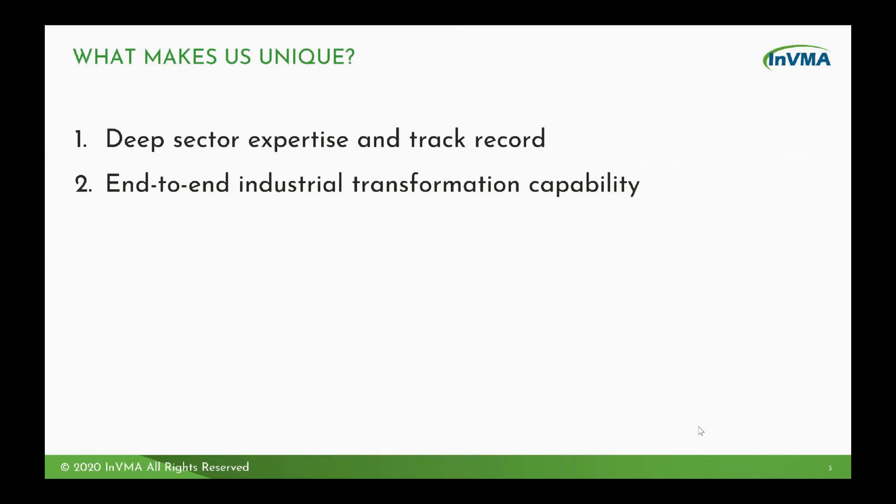We have an extensive ecosystem of partners. They include PTC with their ThingWorx and Vuforia Studio, Microsoft Azure, ARM for connectivity, Dell for gateways and hardware. The other thing that makes us unique is our flexible products and services.

We have our AssetMinder product, which enables you to rapidly get to value in your digital transformation or smart factory implementation. Our services range from a simple discovery workshop to expose you to new technologies that may impact your business, through to a strategy workshop with your senior leadership team to identify where the best bets are to place with new digital technologies.

A design and implementation workshop, which looks at how and what's the best ways of implementing in your specific situation, followed by our more traditional application development and system integration services. And of course, once you have done the implementation, our support package and service level agreements help maintain the savings and investments that you've made.

Why did we decide on starting this webinar series? Well, bluntly, it's because digital transformation is happening now. A recent study by PwC showed that 90% of industrial companies are investing in digital factories. 70% of companies consider digital manufacturing at the top of their operation strategy agenda, according to McKinsey.

And indeed, in the United States, the National Association of Manufacturers have made the statement that industrial companies need to capitalize on digital technologies to defend and advance their competitive advantage.

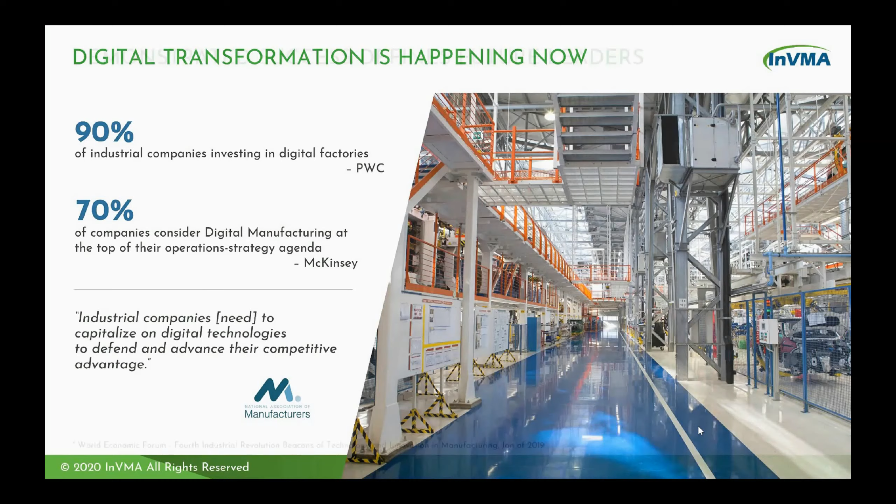Indeed, the World Economic Forum have found that those companies, the lighthouse implementations as they call them, yield a huge impact. They've reported double-digit KPI improvement in areas from factory output increase to productivity, to OEE, to product cost, to time to market reduction.

And indeed, Standard & Poor's have noted that failure to act and make digital implementations over the next 10 years will mean half of the Standard & Poor's 500 firms will be displaced.

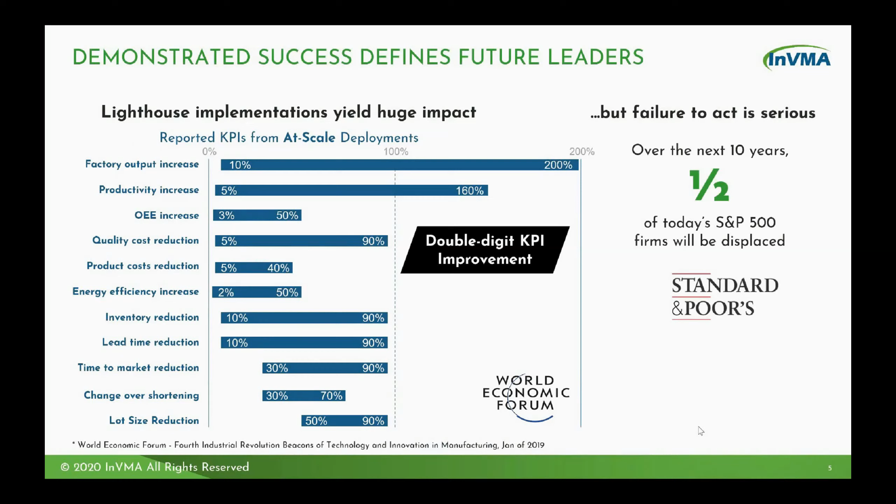Most companies fail to move to this stage of scale and capture value at scale. McKinsey in 2018 identified that in large factories, there are up to 8 digital transformation related pilots running in each factory, but only 25% of those succeeded. 75% of those failed to go on to deliver any continuing value.

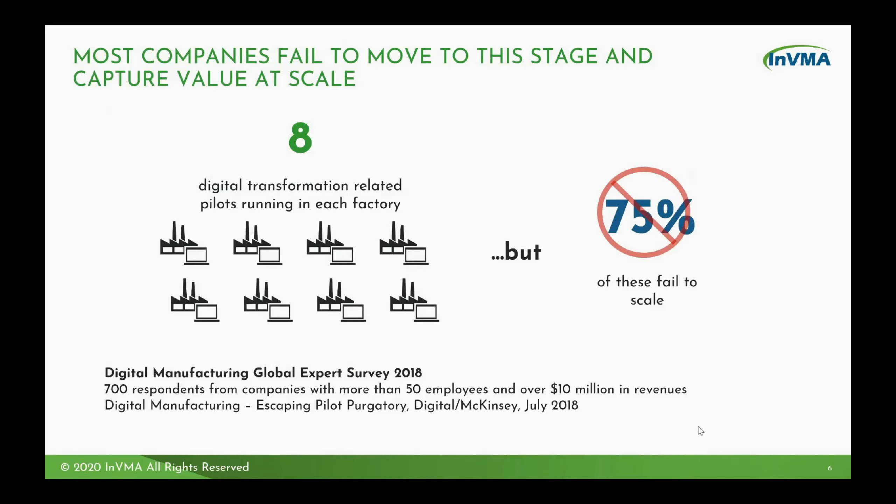And that's why we set up the webinar series. What we're trying to do is, through demonstrations of the technology and our approaches, but more importantly, presentations from our partners and our customers who are going through this process or have delivered on these processes right now, will prove valuable to our other potential customers and current customers.

In the next 25 minutes or so, we're going to discuss the advantages of predictive remote monitoring, and then bring it alive with some use cases from one of our customers and good friend, Alan Findlay from Drive Management Services.

Before we start, we wanted to give some view of the agenda. Really what we're trying to do is show the value of using data to prevent failure and the consequential damage and costs that causes.

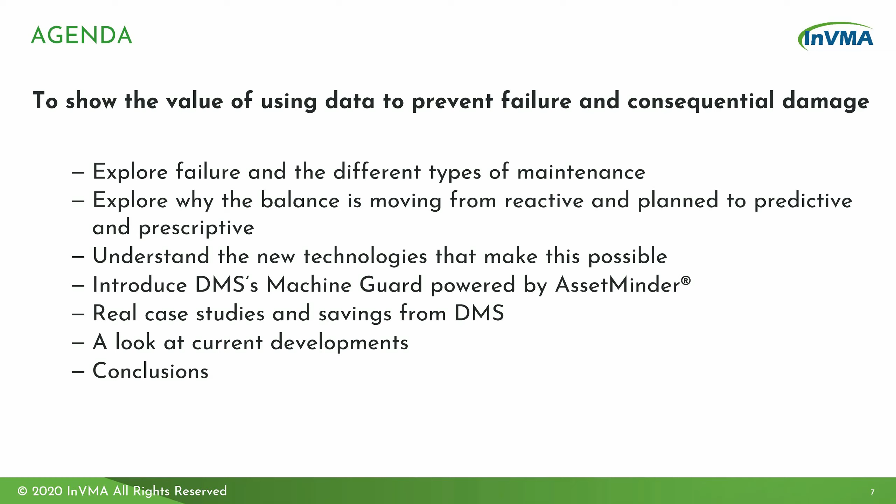We're going to start off exploring failure and the different types of maintenance, and why the balance is moving from reactive and planned to predictive and prescriptive maintenance. We'll understand the new technologies that make this possible, introduce you to Drive Management Services' Machine Guard powered by AssetMinder product, use some real case studies and savings from DMS with their customers, look at current and future developments, then conclude and open up to questions.

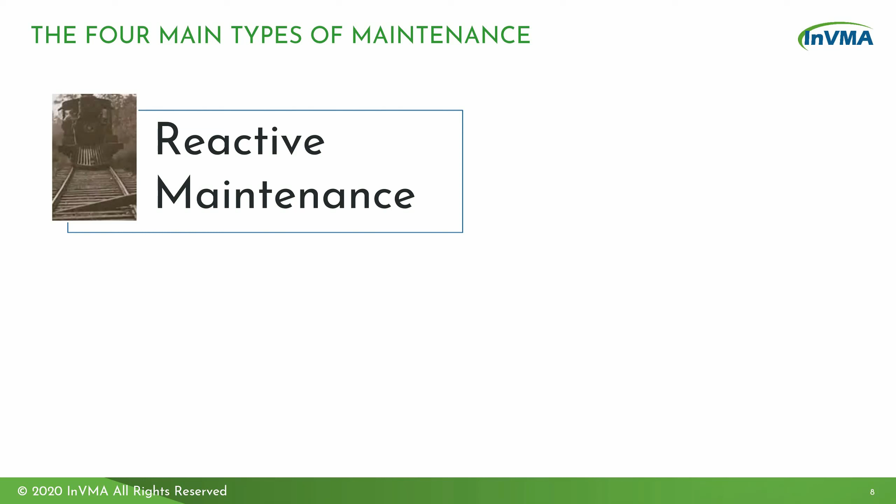Most of you will know this already, but just to recap, there are four main types of maintenance. Reactive maintenance: you wait till it breaks and then fix it. Preventative maintenance, a bit like a car service, where based on hours of usage or time, you go through a checklist and do a set of tasks to extend the life of the product and the asset and stop it breaking down.

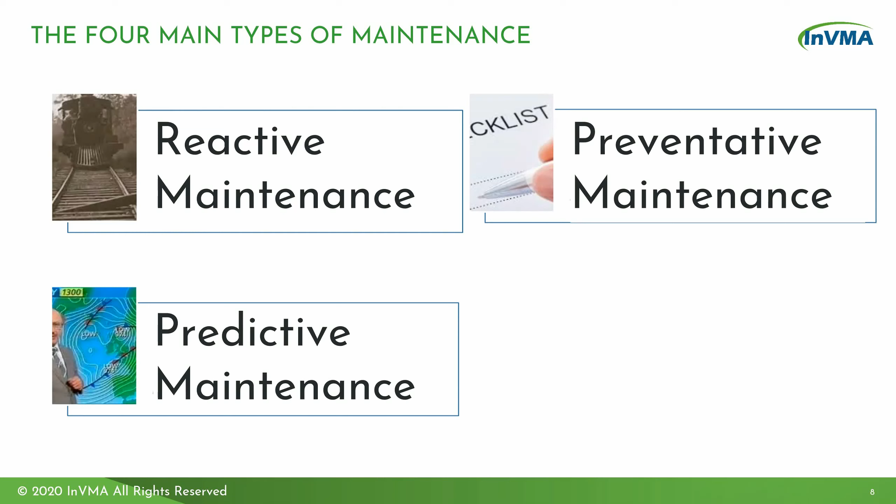Predictive maintenance is what we're going to use today, where you use sensors and measurement to understand the likelihood of a failure occurring and then take action to address that. Prescriptive maintenance is much like predictive, but uses the data to tell you not only when something's going to go wrong, but what is going to go wrong and how you're going to fix it.

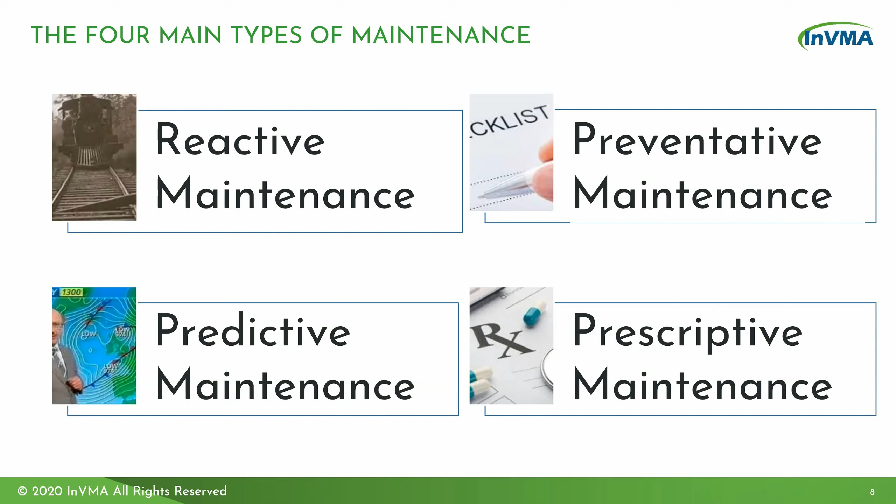The case for condition-based monitoring or predictive maintenance is that for some manufacturers, a 10% reduction in maintenance costs is equivalent to about a 40% increase in sales on the factory P&L. Think about that for a minute. Every pound you save on maintenance, every pound you save on downtime goes straight to your bottom line, and the extra revenue you'd have to get hold of otherwise is significant.

Throughout the world, the best overall equipment effectiveness, which includes availability, is 97%. World class is 83%, the average is 66%, and in some countries, particularly the UK, it's down at 50%. Another way of looking at it, this means nearly a third of investment in assets is wasted - all that kit lying there unproductive. A lot of this waste is driven by poor quality or unplanned downtime.

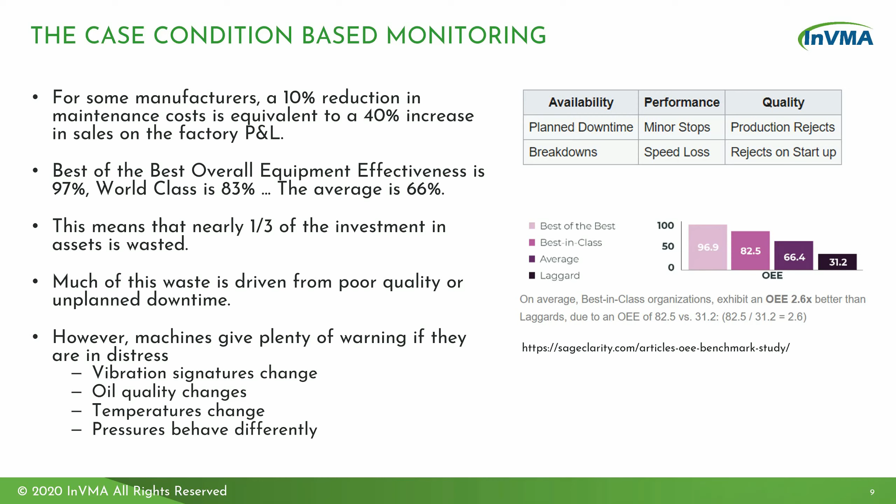However, machines give you plenty of warning if they're in distress. Their vibration signatures can change, their oil quality can change, their temperatures can change, pressures behave differently, and indeed the current they draw will change.

So if we compare two cycles, a normal reactive cycle and a predictive cycle - if we look at a reactive cycle, the asset develops some abnormal health condition, and generally an andon light comes on or there's some indication on the HMI. Then an operator notifies maintenance through a message, for example, or a works order. They open the work order and the maintenance person gets dispatched to the asset.

They look at the sensors, the signatures, the history. They look at the machine overall. They review the asset and then make some remediation based on that and verify it. In that time, you've had the downtime.

Now with predictive, what happens is we get upfront some sort of automated anomaly detection with alert and notification. So the maintenance teams have already assessed that, even before it starts getting into true distress, that there's something to consider. You can have a look online, review the sensors, signature and history, and that leads to shorter debugging and troubleshooting time, and shorter remediation time. You literally go out to the machine with some sense of what you need to address before you get there, and that significantly reduces the amount of unplanned downtime through the use of predictive.

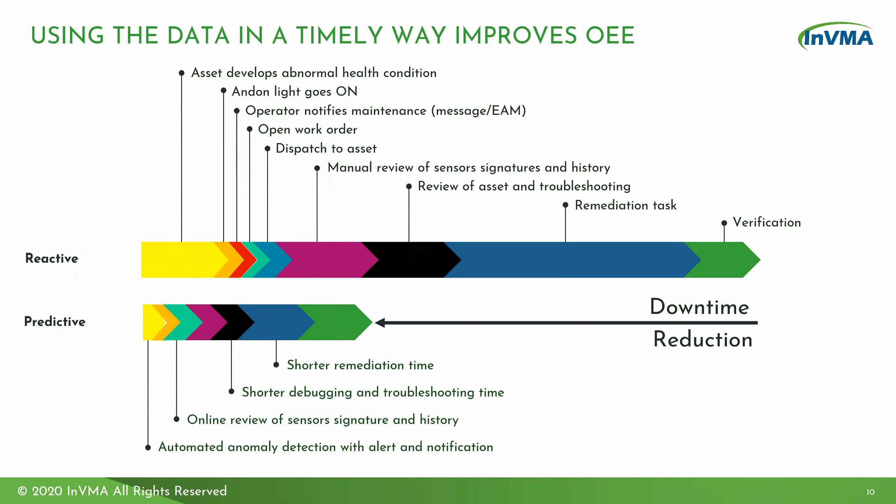But if the case is so obvious, and we believe it really is obvious, what's been stopping us? Well, it's really split into four categories as we see it. The first one is cost.

To put a fixed condition-based monitoring system in puts a lot of hardware and installation cost. Also, when you're specifying machines in the early days, the project engineer will be looking at the CapEx project and what they're trying to do to get inside budget, potentially at the detriment of the overall lifetime operating costs.

Condition monitoring traditionally has involved an engineer or specialist coming to site to attach temporary and handheld equipment against the asset, giving advice on estimated time to failure and the maintenance regime required. That involves a highly qualified person travelling in a van to see you, so it's costly.

The other barrier is access - just getting physical access to the systems and machines, even with handheld items, is difficult in some cases. Wiring in fixed condition systems is in itself disruptive. There's a barrier as well in terms of skills.

A lot of the systems that have been put in are highly complex, relying on significant interpretation of data, requiring individuals in the factory to look at that compared to other issues they may be dealing with around reactive maintenance. So it's not their focus.

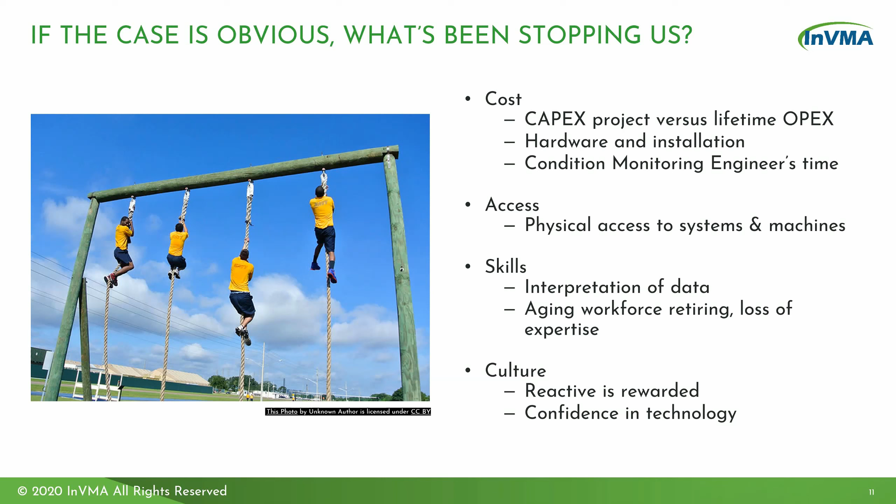Now, to address those barriers, there's a few changes that have been happening. I'm going to go through the technology, and then Alan is going to show a practical implementation of it, so bear with us. The key main thing we have is this convergence, this thing called the Industrial Internet of Things.

We're getting convergence of technology between what is ubiquitous in the IT world and what is happening in the operations technology world - the information technology and operations technology world are converging. The consequence is the cost of technology into the industrial environment is reducing significantly, including the cost of sensors.

I want to go through a few of the main technologies that are really reducing the barriers and explain how. The first thing is the connected assets themselves. One of the key points we had was the CapEx cost of the assets. Well, with the number of assets now where machine connectivity and communication is being built into the core asset - because OEM providers see it as a way of providing additional services to customers - is astounding.

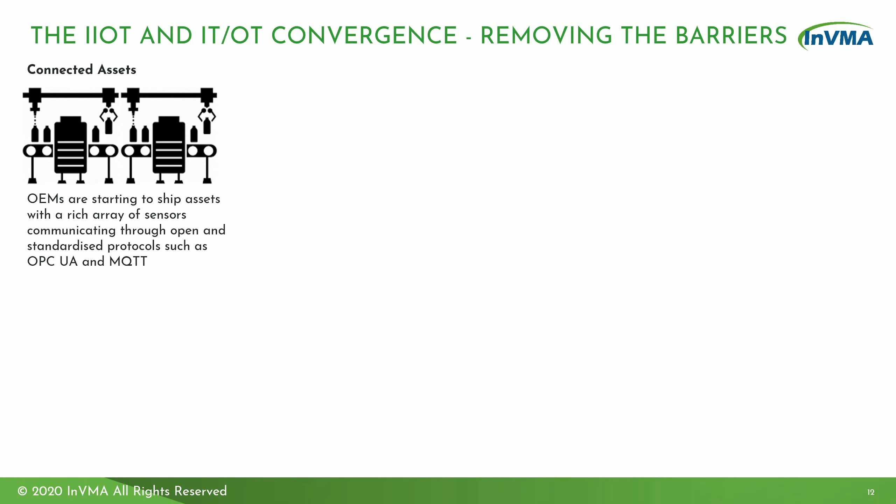So basically OEMs are starting to ship assets with a rich array of sensors now, communicating through open and standardized protocols such as OPC UA and MQTT. So the people putting in new machines are getting in on the act.

The second thing is, if you haven't got new machines and you're looking at doing this on a retrofit basis, there are plenty of wireless sensors and protocols around. Wireless sensors with long battery life are available for cost-effective retrofit - things such as vibration, temperature, pressure, humidity, even health and safety ones around air quality, and certain gases now in terms of wireless sensors.

And what this does is significantly reduce the cost of installation, the downtime, and really changes the swings of where the business case is.

The next thing is compute, the edge gateways - these are industrial small mini computers that sit next to sensors and machines, with some compute locally that can run algorithms to identify if a machine is in trouble. They're becoming more ubiquitous and available; there's a plethora of them on the market, and they have the connection and software onboard to connect to any asset protocol and also these wireless sensors.

Now that gives you the connection. The other thing that's changing is secure fast communication. We've got new 4G, 5G networks with secure private access point names, private APNs, providing access to cloud computing. We've got new industrial standards about machine connectivity and security, which are ensuring that the data coming from a machine and going to analysis elsewhere is very well supported.

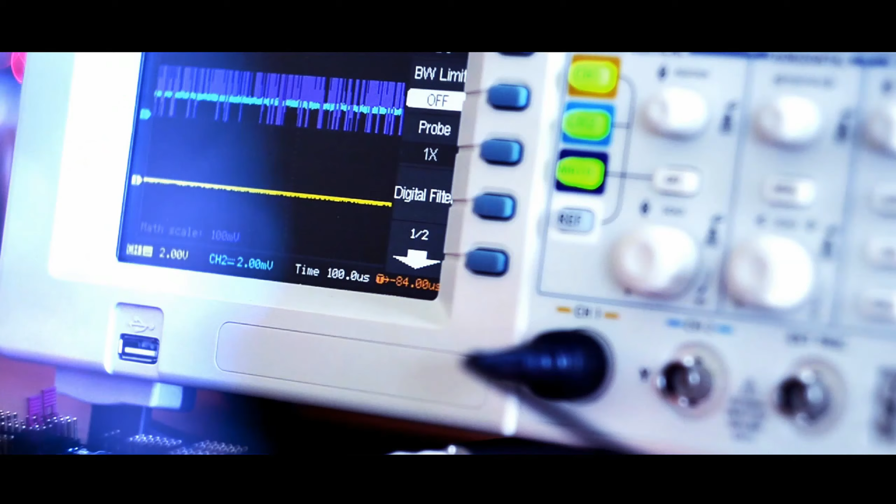Introducing a revolutionary approach to condition-based monitoring. A system that has been designed, tested and refined over the past 20 years to offer a truly remarkable, cost-effective solution to virtually every industry sector.

The Machine Guard solution has been developed to identify potential mechanical failure within critical assets, enabling you to take necessary action before any costly problems occur.

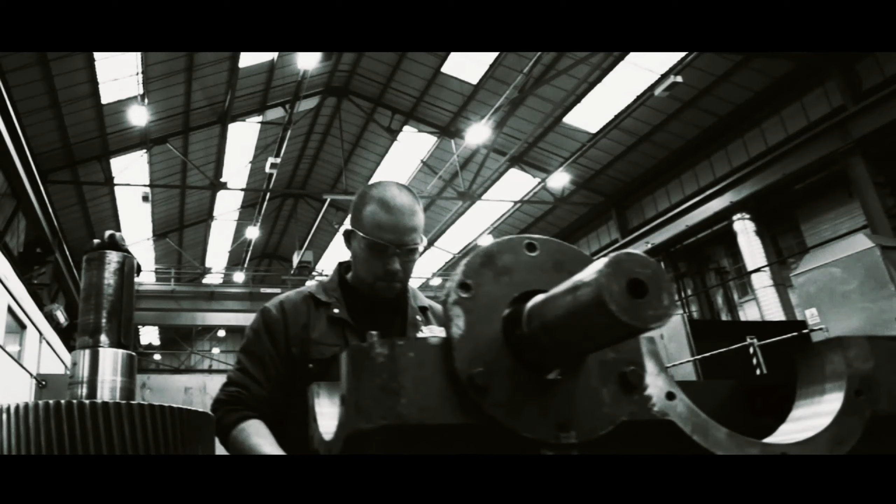Machine Guard's core technology, which originated in the highly specialized aerospace and Formula One motorsport environments, has helped save our clients literally millions of pounds in lost revenue due to unnecessary downtime.

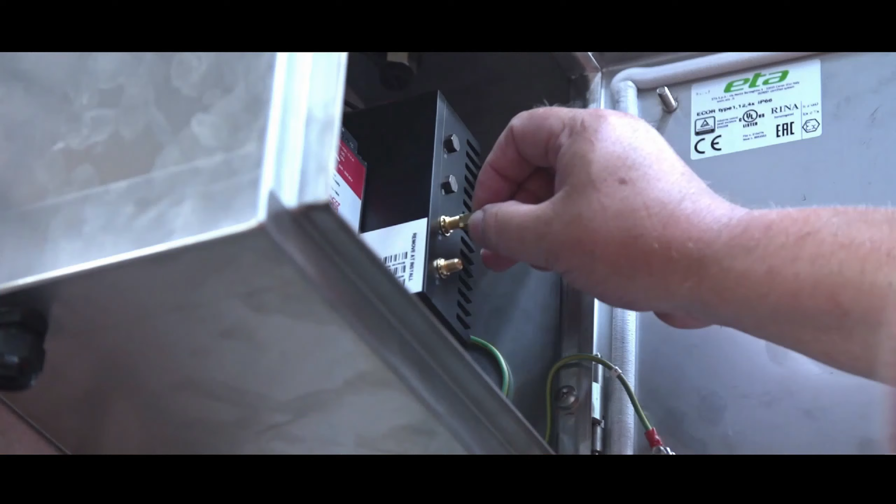We work closely with every client to identify their critical assets and outline the best way to apply the Machine Guard solution. The easily installed gateway can accept data from a wide variety of sensor types, including our cutting-edge Bluetooth vibration and temperature sensors, suitable for use on any critical rotating or reciprocating equipment, including gearboxes, electric motors, fans, pumps, and much more. And because it's a wireless solution, installation is quick and efficient.

Streamlined access means any internet-connected device can be used to monitor critical assets via the AssetMinder cloud-based platform, a powerful 24/7 managed monitoring system providing alerts that can be triggered using the format best suited to your business.

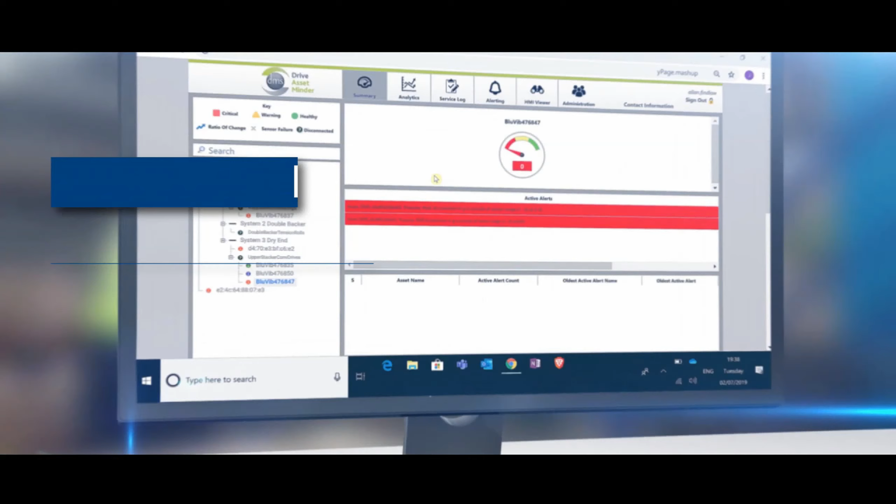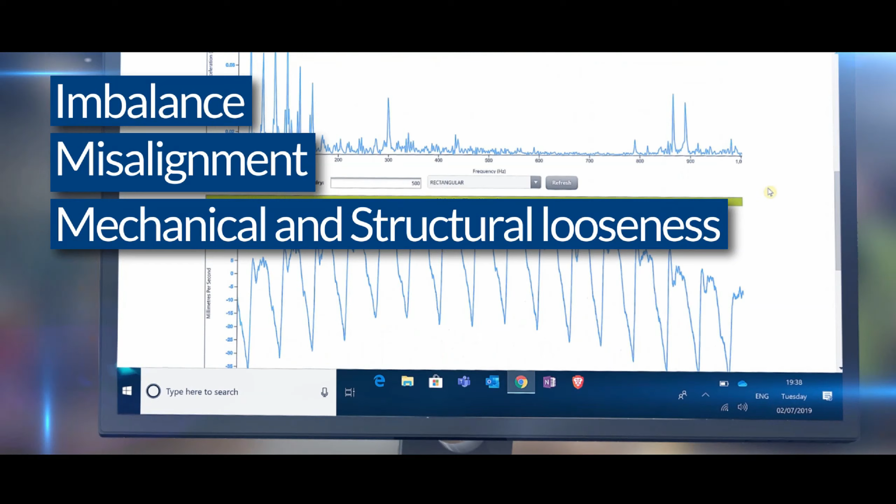From a single site to a global operation, Machine Guard, powered by AssetMinder, can provide the kind of all-encompassing protection your organization needs. Remotely identifying imbalance, misalignment, mechanical and structural looseness, bearing and gear damage, lubrication starvation, cavitation, and other potential issues. Welcome to the power of predictive maintenance.

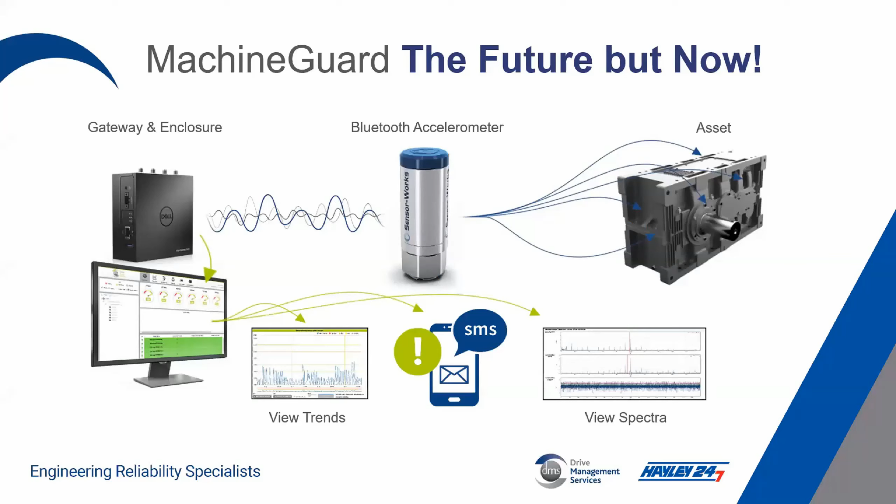As you've seen on this video, this is the future, but it's also here now. As an engineer of 40 years experience, I can't begin to tell you how delighted our site installation engineers are now that we have these Bluetooth accelerometers.

It reduces our installation time by approximately 75%. No running cables in along existing cable runs, trying to identify tray width that is suitable, and finally, trying to install cables in locations that are difficult to access.

1, continuous monitoring to a predetermined scheduled time. 2, wake up. It wakes up every so many seconds, assesses the vibration level, and if an alarm level hasn't been exceeded, switches itself back off, only alerting on exception. And 3, triggered manual wake up via a magnetic switch.

They use ultra-low power and use replaceable batteries, utilizing Bluetooth version 5 for increased battery life. In your traditional industrial facilities, you can expect to collect data from 50 meters away. There are also 2 versions available, a non-hazardous and an ATEX hazardous.

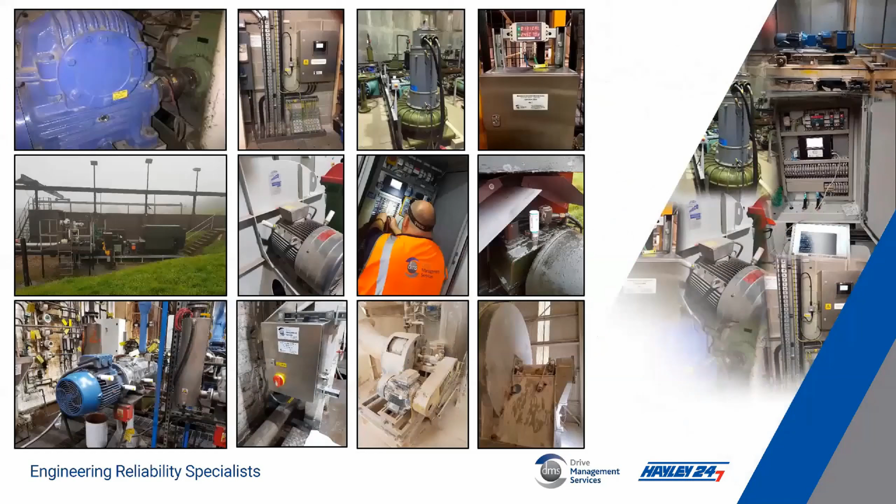The next section is based on 3 case studies that all display the capabilities of the hardware, system, and more importantly, the diagnostic service we provide.

Case study number 1 is a critical stack fan located in the main process plant of one of our clients. The system was installed with us taking readings from both motor bearings in the radial plane, both fan bearings in the radial plane also, and an axial reading from these fan bearings.

DMS receives alerts regularly from the motor, so the DMS diagnostic engineer quickly identified by the velocity FFT that you can see on the screen that the motor was loose.

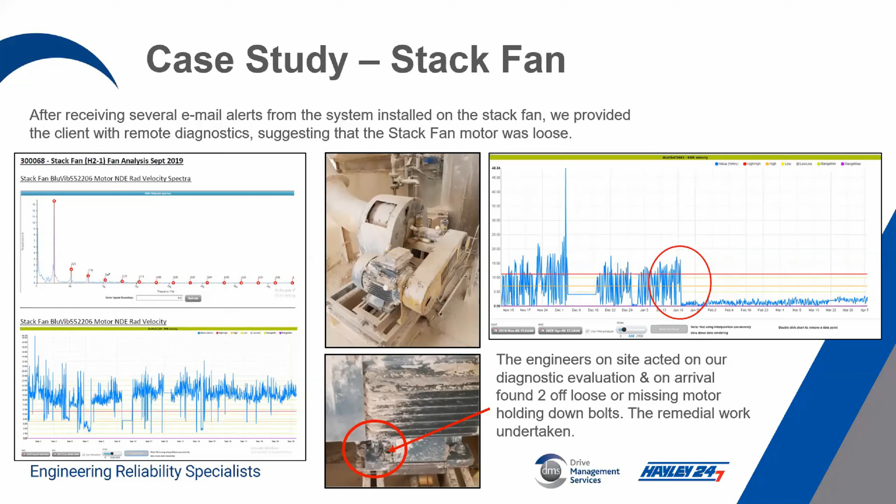The site engineers acted on our evaluation and found the 2 holding down bolts at the non-drive end of the motor were loose, and actually one had the nut missing. You can see the trend readings after the remedial work was completed on the right hand side.

The second case study: within the first month of our system being installed on this major critical process fan, we received a number of email alerts in acceleration on both the fan bearings.

On completion of our analysis, we were able to advise the client that both fan bearings had significant wear and damage, which had been identified by the defect frequency for both the rolling elements and the cage.

Unfortunately, because this is a 24-hour process plant, the next planned window for maintenance wasn't due to take place until the 2nd week in October 2019. As part of our service, we were asked to monitor on a daily basis and report to the client if these bearings deteriorated faster and quicker than anticipated.

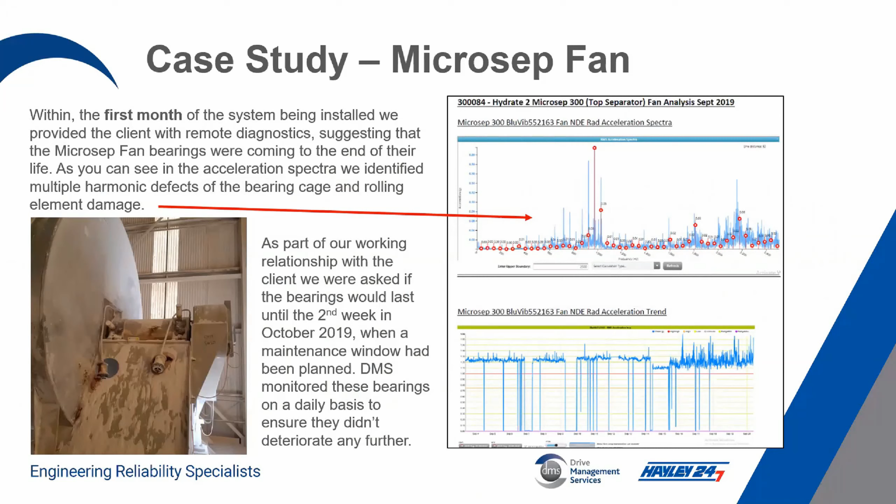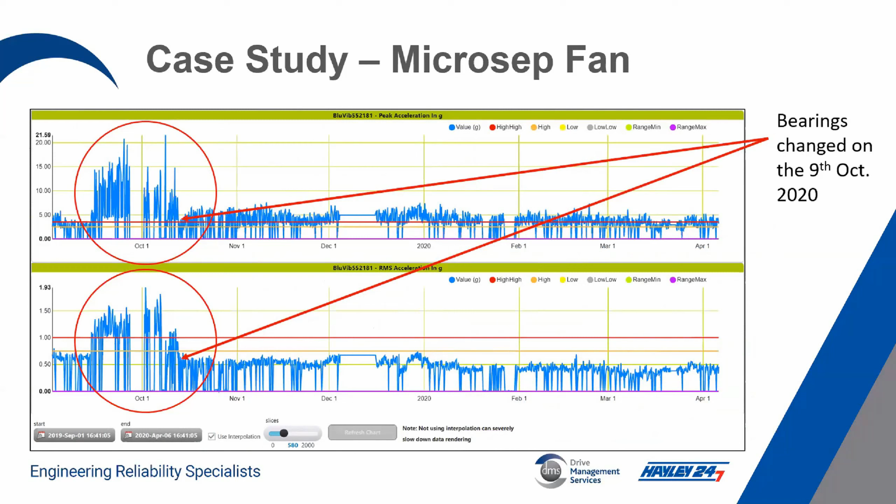You can see from this slide how, together with the client, we managed to nurse these bearings until the planned change on the 9th of October 2019. Since this bearing change has taken place, the levels have stayed consistently lower and within agreed levels.

Case study number 3: we were invited to work with a UK specialist fuel pumping station to help them monitor their critical multi-stage pumps. These pumps are unmanned and in a remote location.

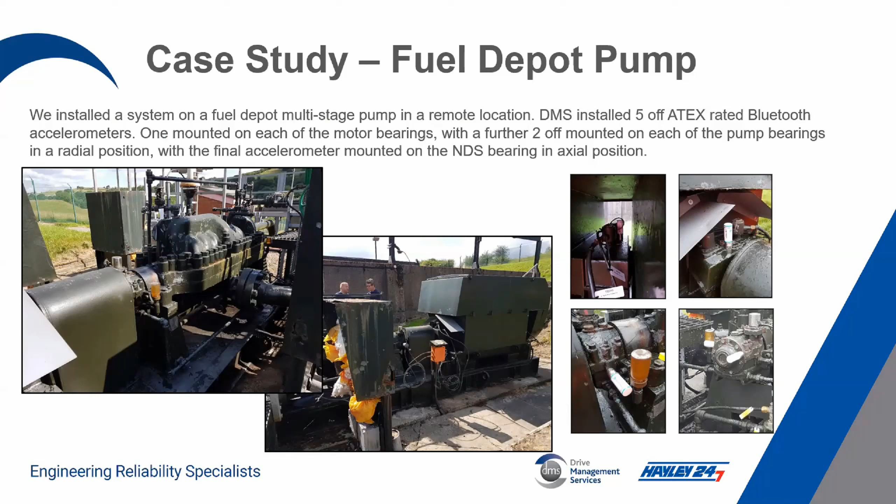We installed 5 off ATEX Bluetooth accelerometers due to them pumping fuel and monitored them in the following positions: both motor bearings in the radial plane, non-drive end and drive end, and both pump bearings in the radial plane, drive side and non-drive side, and one final accelerometer on the axial position on the non-drive side. These can all be seen in the photographs on the right-hand side.

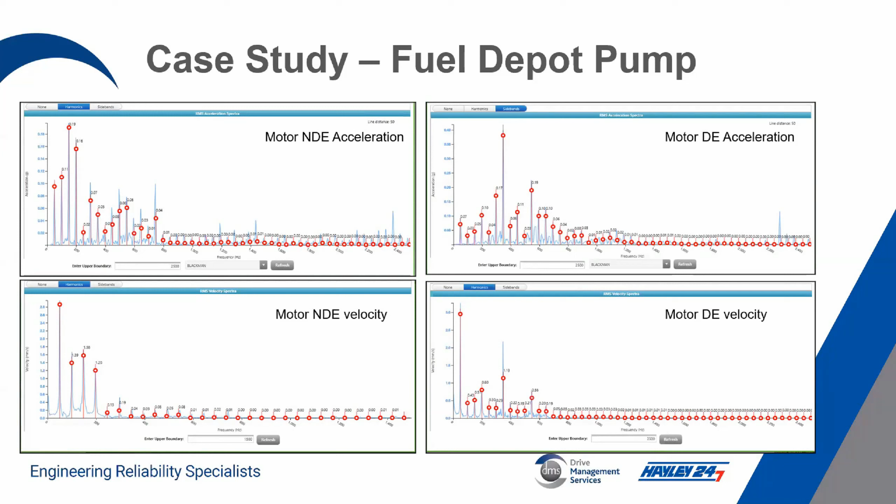Within 6 weeks of the original installation, we were receiving alerts on both RMS acceleration and peak-to-peak acceleration from both motor bearings. On analysing the FFT information from the Bluetooth accelerometers, we suggested to the client that we thought there was mechanical looseness, probably associated with significant wear on the white metal bearings, and as a consequence should be investigated on an urgent basis.

Prior to the client removing this critical asset from service, they requested further confirmation of this suggested condition. We at DMS arranged for one of our CBM engineers to visit site and take a full set of readings using our machine-centric handheld vibration analyzer.

On receipt of this separate report, the asset was removed from service and delivered to a local independent engineering repair centre who specialise in motor and pump overhauls.

On completion of their investigation, they generated a report which confirmed that all the white metal bearings in both the motor and the pump were significantly worn and had progressive loss of white metal in the loaded zone.

This damage had also created secondary damage on the impeller hub locations, which were worn and scored, suggesting that the hub had been rubbing against the bush. This was a fantastic result for both DMS and the client.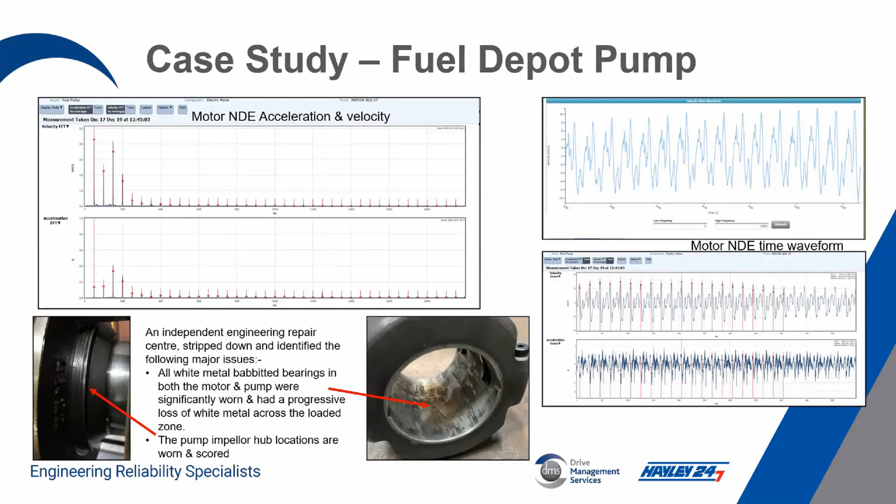So what are the benefits of using the DMS Asset Minder platform? We have remote system adjustment once installed, using inbuilt Kepware and Ubuntu on the gateways, enabling additional sensors to be added easily and amendments to be made quickly. All types of sensors can be monitored: oil condition, oil temperature using TAN Delta oil quality sensors, flow, pressure, running speed, ultrasound, fuel density. This enables us to monitor the all-round condition and health of the machine, not restricted by traditional condition monitoring sensors.

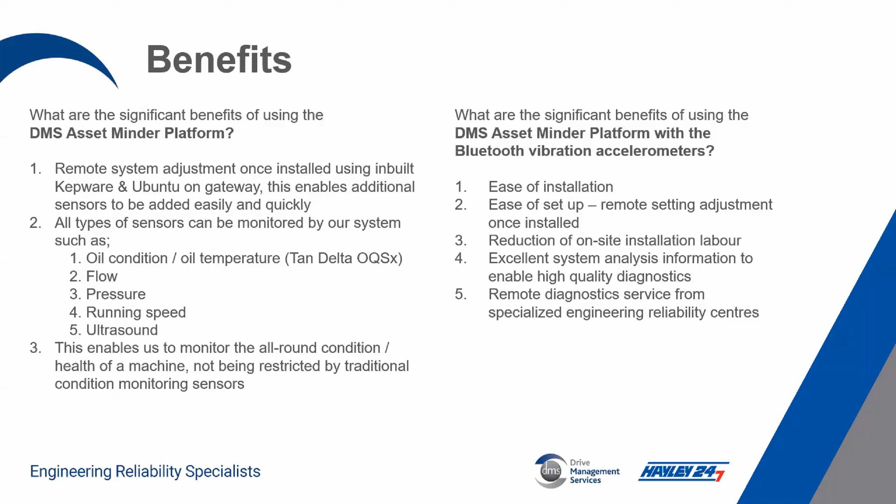So there are significant benefits of using the DMS Asset Minder platform with Bluetooth vibration accelerometers: it's easy to install, there's ease of setup with remote setting adjustment once originally installed, a reduction of on-site installation labour, excellent system analysis information enabling high-quality diagnostics, and remote diagnostic service from our specialised engineering reliability centres.

If we look at developments going forward that are here now, we have technology available where we're looking to integrate into the machine guard system. This is the starting process for machine learning, taking data from various parameters, as you can see on screen, and understanding what certain operating conditions are considered normal.

However, when a system starts to see a change or an anomaly, in near real time, we can use that information to determine what the alarm rules and settings are.

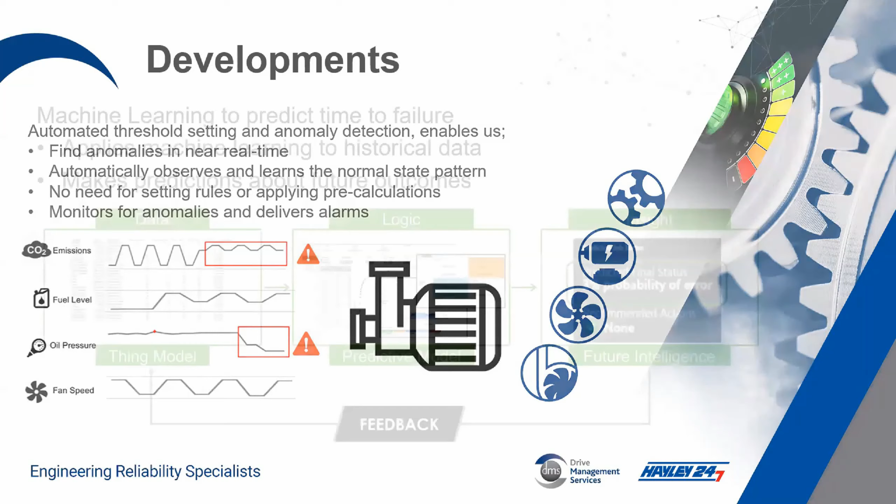Machine learning enables us to build a predictive model based on historical data and compare it to near-live data. This predictive model enables us and our clients to make insightful decisions. This is known as a digital twin, as it compares real live data from a machine to a model of a similar or identical machine in certain operating conditions. This makes our decision-making process smarter.

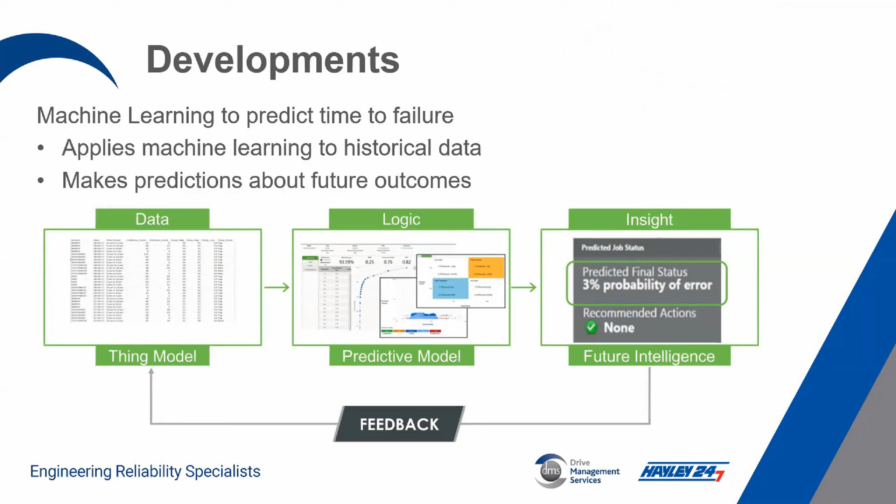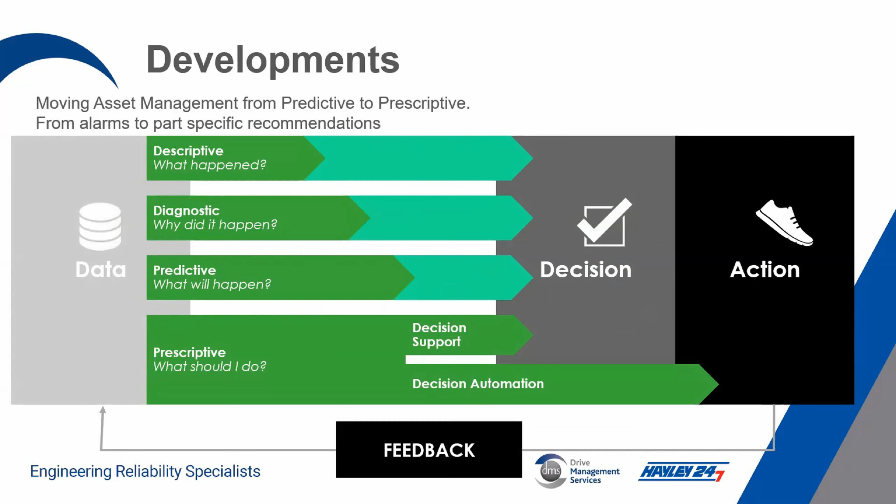This final slide displays how we see the maintenance engineering journey becoming more apparent in the forthcoming months and years. This is the stage that will enable us to automate some of the work of the condition-based monitoring engineer on an expert-type monitoring system, leading to the next step in achieving world-class performance. We take the data, we make a decision, and we have an action.

To summarize, predictive and prescriptive maintenance is more cost-effective than reactive for critical assets. The historical barriers restricting clients from using this technology are eradicated with the reduction in sensor, equipment, installation, and service costs. New sensor technologies such as Bluetooth accelerometers are extremely powerful, on the cutting edge of technology, accurate, and deliver real, precise, sensitive data.

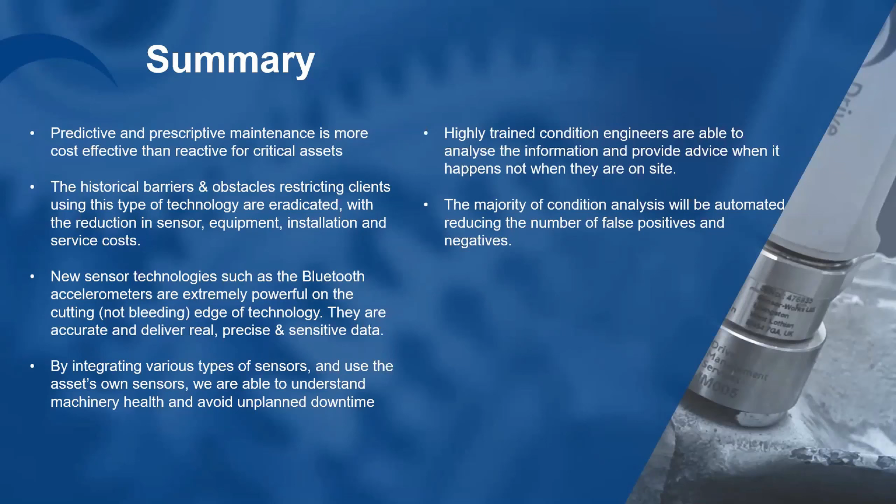By integrating various types of sensors and using the asset's own sensors, we're able to understand machinery health and avoid unplanned downtime. Our highly trained condition monitoring engineers can analyze the information and provide advice when it happens, not when they're on site. The majority of condition analysis will be automated, reducing the number of false positives and negatives.

Our offering is based around our service. The majority of our competition in the marketplace are equipment manufacturers, more interested in selling equipment, and they don't have the same service ethics that comes as our own DNA. Our people are our strength: highly qualified diagnostic engineers employed to support all our global clients.

The case studies presented today demonstrate our highly developed IoT technology enables our people to deliver real, quantifiable savings and results. This remote monitoring enables us to be regularly in touch with our clients without necessarily being on site, while still delivering a real valued service. As the technology develops further, we'll be able to implement machine learning on various machines that will provide machine health data far beyond traditional monitoring methods.

Welcome to the power of true predictive maintenance. Thanks for listening. Do you have any questions?